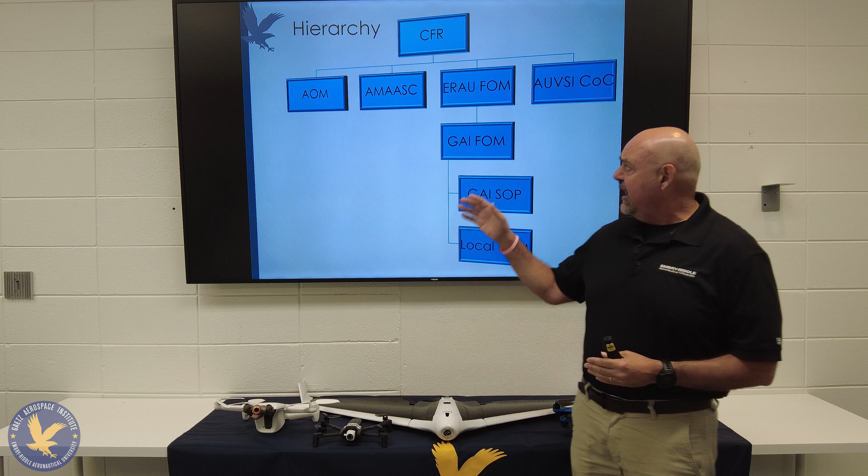Beyond that, we go down through the ERAU Flight Operations Manual, and then down to the Gaetz Aerospace Institute Flight Operations Manual. Every year we do a Stan Board to make sure everything we're doing is in accordance with the latest CFRs and with the Embry-Riddle FOM, to make sure we're within those guidelines. We promulgate that out to the schools so everybody understands how it's done. That's what this is about.

We're going to have you do this brief before you guys start flying, and before you start flying you're also going to be doing the TRUST certificate. The TRUST certificate allows you to do hobbyist flying, but also allows us to fly the drones in the classroom setting, okay?

Your SOP, our SOP, is for you to use as well. The SOP is a little bit more restrictive, and your further restrictions can be in your local FOM. So that's the hierarchy: the FOM, the SOP, and then your local FOM. Your local FOM cannot be any looser than what we do as guidelines in our FOM. You can be more restrictive, and that's the purpose of that, to keep you safe, because there may be things in your school that you have to be aware of that don't allow you to do the things we have at other schools.

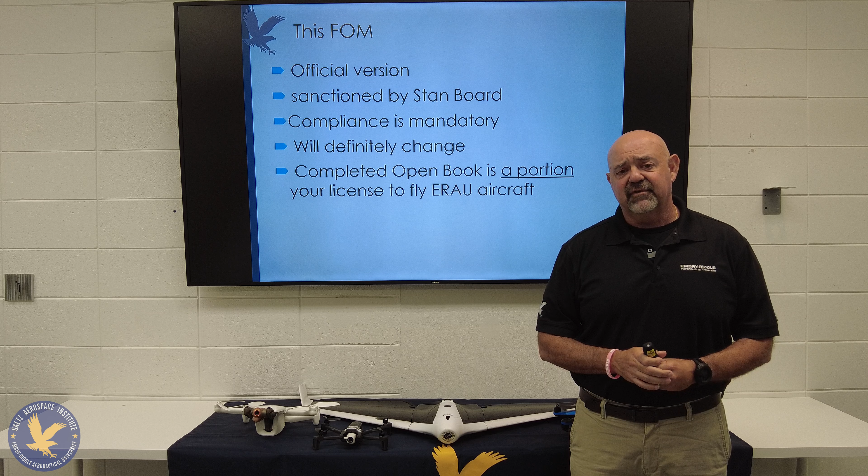Completed open book test is a portion of your license to fly ERAU aircraft. You have to get that open book test completed. As a student, you get a 95. For instructors, it has to be 100%. Open book corrected to 100%. Not a big lift, but we want to make sure everybody understands the material, because that's important for us to make sure you guys are flying properly.

Before we go any further, I'm going to brief you quick. You guys see the drones up here. We've got the Anafi AI, we've got our Anafis, we've got the Disco, and then we've got the Skydio.

So these are the drones that we are going to be using. There's a bit of a change. Everybody knows the DJI has been an issue with other schools. So now what we're doing is we're trying to use the Skydio and the Anafis and the Anafi AI to complement what we're doing. The fleet's going to change over. It's going to be a long changeover process because the cost of these is much higher than the DJI products. But I want you all to understand that these will be the fleet going forward, so we'll get very comfortable flying these, and we want to make sure you guys are flying them properly.

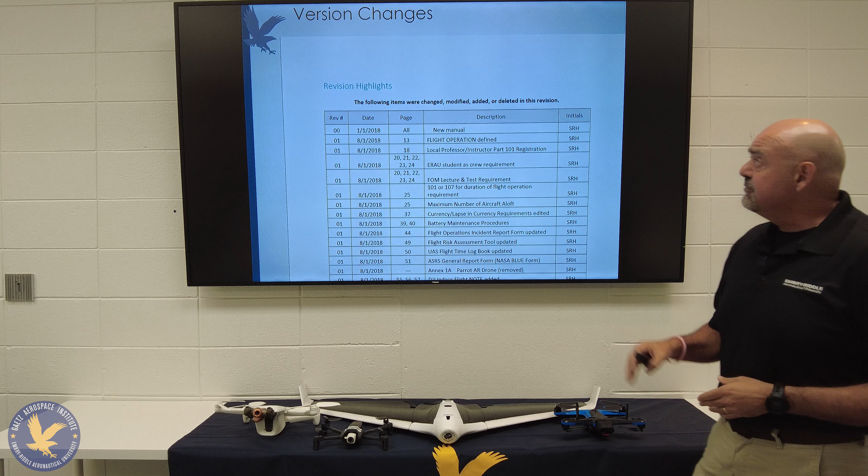Okay, going back to the FOM brief, revision and highlights. This is how we do our changes. So when we brief this, if there's any changes that come out from the Stan Board, this is where you'll find all the changes.

Policy: teachers and instructors are responsible to ensure each student is thoroughly familiar with local FOMs, locally created FOMs, not to supersede the requirements of the GAI FOM. So again, your local FOM could be more restrictive, but it cannot be any looser than what we do here at Embry-Riddle, okay? And that's why those local FOMs are there.

Okay, keywords: will and shall. Those denote mandatory, okay? If something in that FOM says will or shall, that is a mandatory thing you must comply with. Should: preferred but not mandatory. If something in there says should, that means it's not mandatory, but it's highly recommended. May suggests something suggested, so if we say something along the lines of may cause injury or may allow you to do something, that is something that's suggested, so pay heed to that, okay?

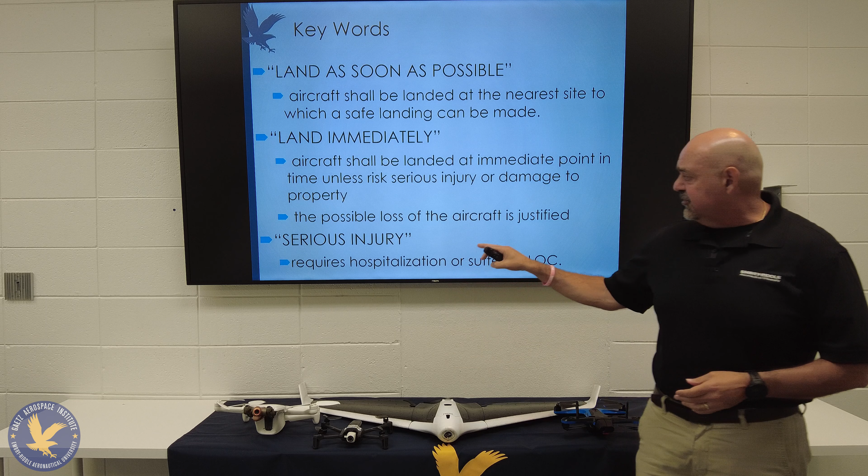Possible loss of the aircraft is justified when serious injury requiring hospitalization or loss of consciousness is at stake. We don't want anybody to get hurt.

So when we're flying these drones, please, please, please be very careful. They look small, but if this thing's coming at you at about 30, 40 miles an hour, it's going to hurt. It could actually cut you and possibly kill you.

Flight crew member or flight personnel: any person, teacher, student, or other who is associated with given flight operations. You're part of that flight crew, and everybody in that flight crew is responsible for safety.

If you see something, say something. If somebody's walking into the path while you're doing flight operations, you need to halt those operations and make sure everybody's safe. Everybody out there has a portion of responsibility for safety.

Deviations are authorized in the interest of safety. So if something happens and you have to deviate outside the acceptable lines, for example, if an aircraft or something comes into your flight path and you have to go above your restricted altitude momentarily to bring that aircraft back down, that's okay. You're allowed to deviate, but you need to get that aircraft back down as soon as possible, because you're doing that in the interest of safety.

If that does happen, though, you need to let us know as soon as possible. If any of these things happen, let myself, Charles, or Blake know right away, so we can make sure there are no repercussions to you or the school.

Local permit deviations and waivers are possible, but must be approved by the GAI Executive Director. If you have some sort of deviation or waiver you're trying to get, we need to know about it. We'll look at it, evaluate it, and see if that's something we can push forward.

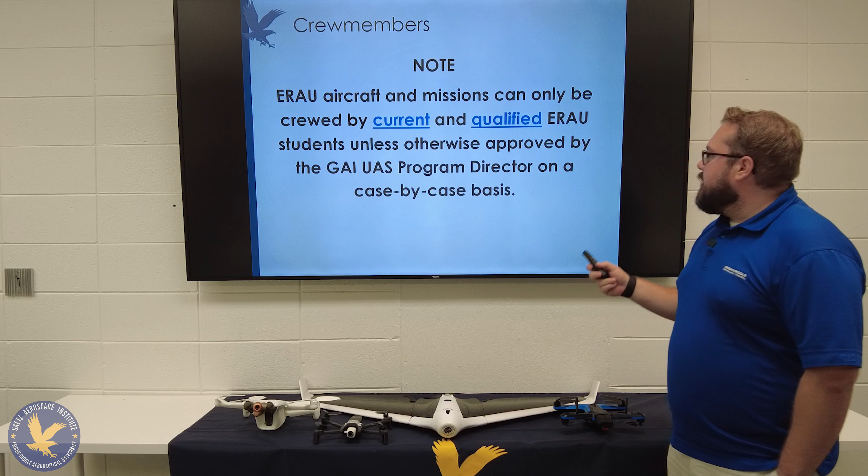Note: ERAU aircraft and missions can only be crewed by current and qualified ERAU students, unless otherwise approved by the GAI UAS program director on a case-by-case basis.

So what does it mean to be current and qualified? First step is FOM, having the test done, and secondly, having the TRUST. The ERAU instructor has different qualifications they have to uphold as well: one is the FOM open book test, the same as the students, and secondly, they're going to have their remote pilot in command certificate through the FAA, along with their TRUST as well.

Note, in place of the rule set formerly referred to in this FOM as Part 101, the reader may see the phrase 'the exception.' This maintains continuity with the exception for limited recreational operations of unmanned aircraft. To add a bit more confusion, we used to talk about Part 101 hobbyists, then the FAA started calling them the exception, and now the exception has turned into the recreational pilot. So if you hear any of those three terms, we're talking about flying for fun, without a commercial purpose. And if you hear about the exception or recreation, this is where TRUST falls into the realm of things.

Here at Riddle, we are all flying under the educational realm. We're flying under Part 101, the hobbyist, the exception. We have that mindset. But we hold our teachers to a higher standard of having that Part 107, that RPIC certificate, because we want to build rigor.

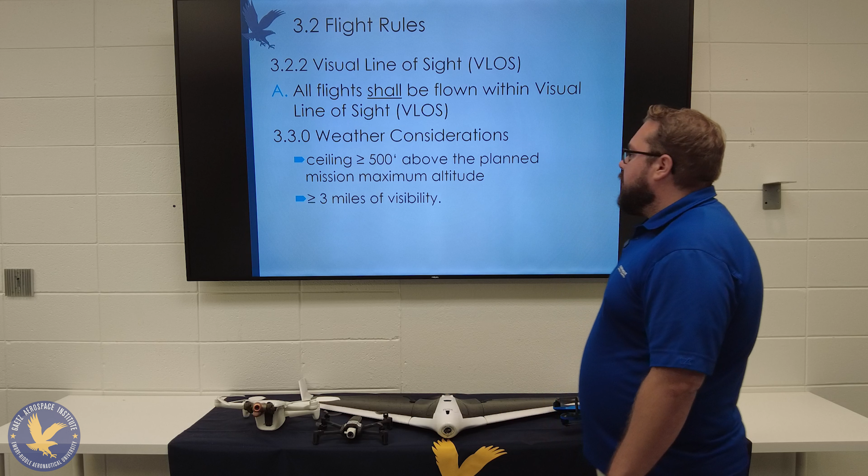Weather considerations: ceilings greater than or equal to 500 feet above the planned mission maximum altitude, and visibility needs to be greater than or equal to 3 miles, and that goes right back to the actual FAA weather limitations. Outdoor flight operations shall not be conducted with audible thunder, visible rain, and winds.

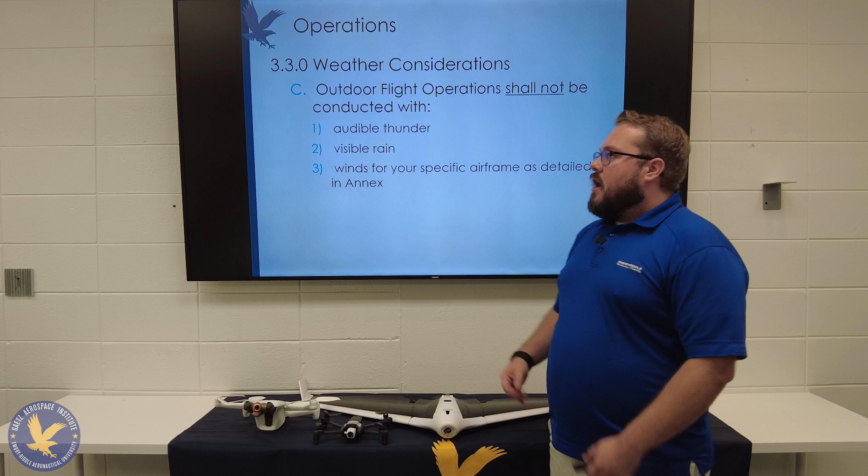You see your specific airframe is detailed in the annex. In the back of the FOM, we have an annex where we talk about each of the aircraft and what winds they can sustain.

What wind limitations the manufacturer has set and what we've put on there. So audible thunder and visible rain, moisture is not a friend for electronics. Thunder, we don't want to get electrocuted, we're not trying to get struck down. So in any of those situations, outdoor flight shall not be conducted.

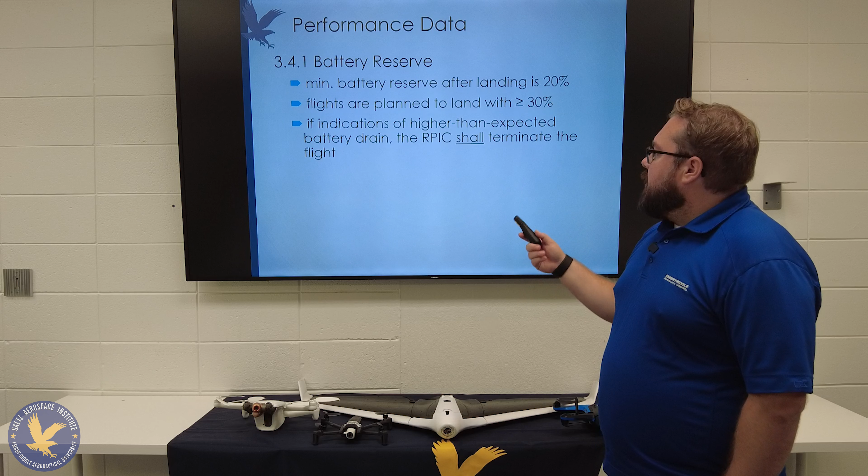Performance data, battery reserves. Minimum battery reserves after landing is 20%. Flights are planned to land with greater than 30%. If indications of higher than expected battery drain, then you shall terminate the flight.

Always keep an eye, even as the RPIC, on your battery. Yes, you're watching the aircraft, you're doing visual line of sight, but you're allowed to look down every now and again and check your battery. If not, the team lead should ask every now and again, what's your battery level?

Where are we at? At 30%, you should start considering returning to home and getting closer to the landing and takeoff position. If you're around a little above 30, start heading back. If you're at 30, you're definitely heading back home, stop what you're doing. If you get below that and you missed it, definitely start bringing it back.

At 20%, you should be on the ground. Don't let it drop below 20. It's the nature of these lithium polymer batteries - the cool thing is they have a constant voltage and amperage, which is great, but they don't slowly die, they knee off really, really hard. That means you can go from 100% full functioning battery to absolute zero like that.

And if the drone's at 200 feet, then it falls, and now we have a broken aircraft. So we want to keep you flying and keep us from working on aircraft. So at 20%, it should be on the ground.

Now let's say you're not at the takeoff landing location at 20%. If you're in a suitable area where you can land it in the grass, it's just further away, then land it, land it as soon as possible. It goes back to the definitions in the beginning of the PowerPoint - land as soon as possible, land as practical, so that you don't damage the drone.

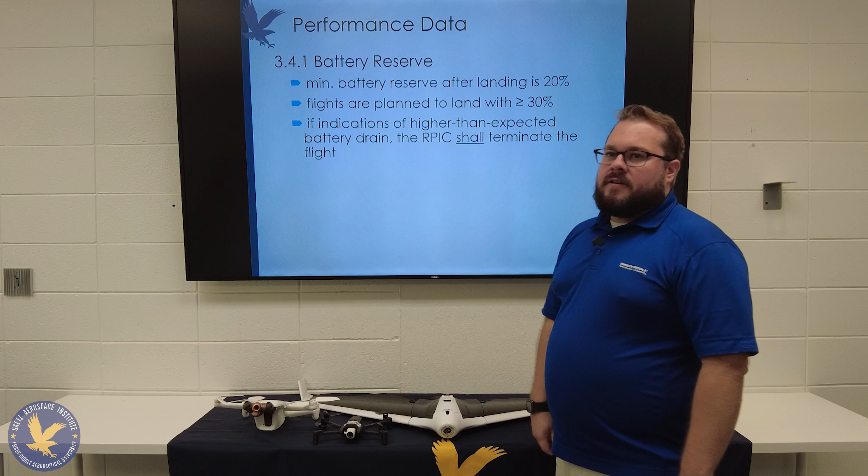If indications are you see battery drain happening a lot quicker than normal - if you're usually getting 30-minute flight time out of a battery, 25 minutes, 20 minutes - and next thing you know it's like, oh, we've only been flying this thing for like 5-10 minutes and we're already at like 30% or 40%. That's not right.

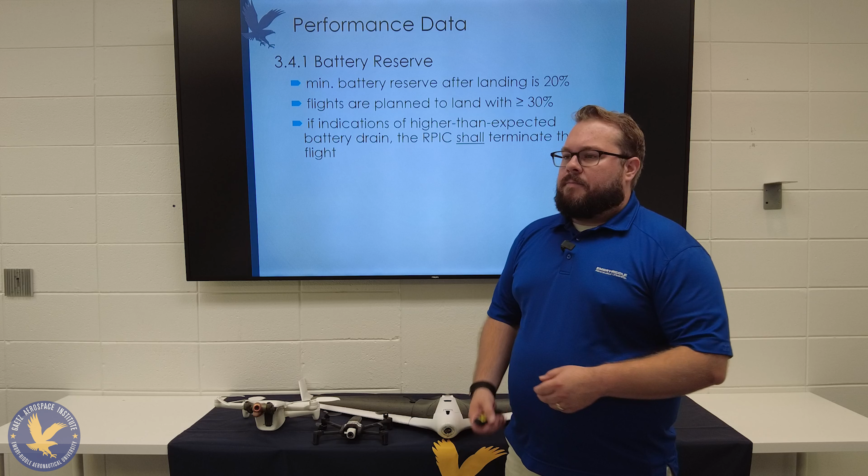That's where you need to land as soon as possible. You got to terminate that flight because that could lead to the aircraft falling out of the sky.

Landing requirements: if for any reason the GUI shows 20, land as soon as possible, just cover that. For any reason the GUI shows 10, land immediately, but do not sacrifice the aircraft. Do not do that. We're not losing aircraft today.

3.5, site requirements. Small unmanned aircraft system flights should, to the greatest extent possible, be conducted over sites that are unpopulated, uninhabited. VTOL aircraft, non-essential persons not within 10 feet of the aircraft, should not be flown over 250 feet above ground level unless required by curriculum goals and mission requirements, and shall not exceed 400.

So let's cover all that. Flights should be, to the greatest extent possible, over unpopulated, uninhabited areas. Well, we're at a school - obviously it's populated, and obviously there's people below us.

What does this mean? It means if we're flying on the football field or over the practice field, and let's say we're flying over the football field with a track around it, all of a sudden here comes the gym class and they're running around on the track. You shouldn't be flying over top of the people at all. That's a big rule breaker.

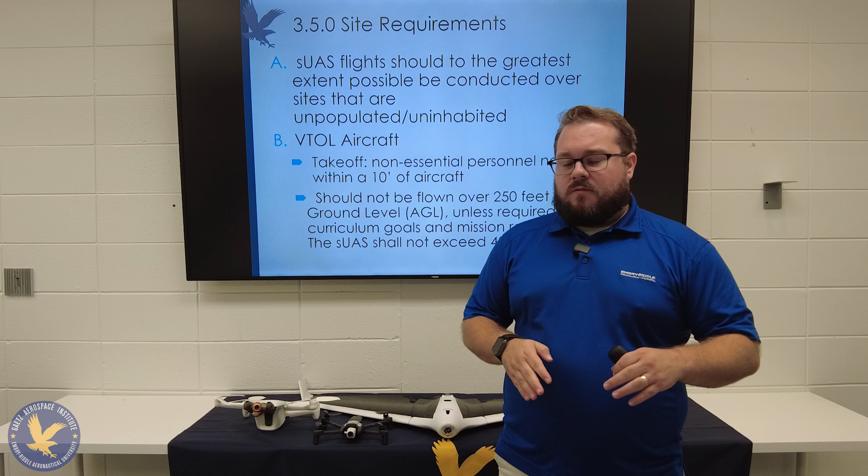If you are asked to do some other events where you are flying around people, you don't want to fly over the general public. There are certain rules that you can do this under Part 107, but under our FOM we do not fly over them unless absolutely necessary - meaning there's an emergency situation or some reason to get the aircraft back and you have to transition over people, then do so.

VTOL aircraft, that's vertical takeoff and land, such as all of these except the Disco here. Stand at least 10 feet from the aircraft before taking off.

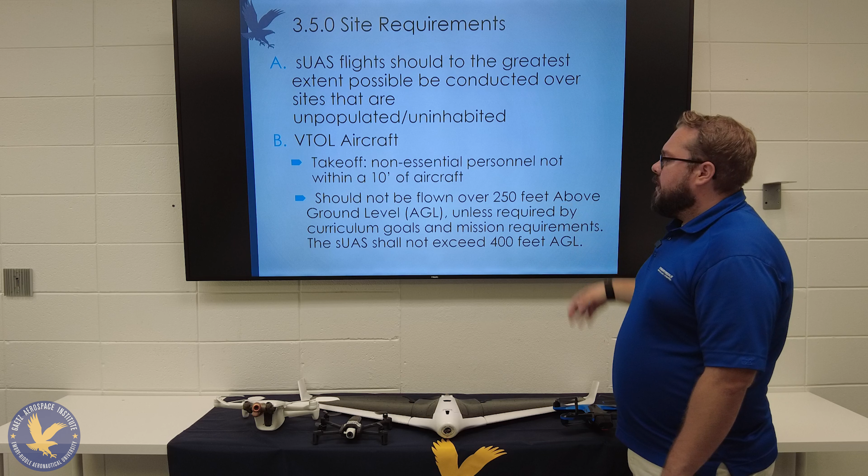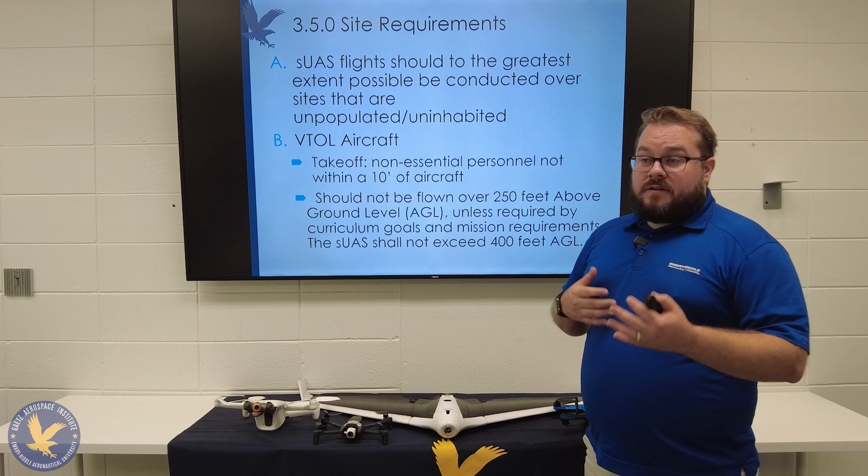We do not fly over 250 feet above the ground unless required by the goals or the missions. Typically, all of our flights will be done within 100 feet of the ground or even 50 feet. For the 235, I would see myself maybe getting in the 150 range. For the 237, we may need to go above this if I'm making a video of the campus and getting large wide-angle shots. But no matter what, we shall never exceed 400 feet. This has to be set forth and approved by the instructor beforehand.

Reference the FAA UAS facilities maps. If an aerodrome manager or a control tower exists, then LAANC approval is required. How do we get LAANC? What is LAANC? LAANC is the authorization when we're inside airspace that's not Class G or E. So we're talking B, C, D airspace. We need approval to fly within that airspace because that airspace goes to the ground, and if we're 1 foot off the ground, we're inside their airspace, we need permission to be there.

LAANC is an automated app-based notification system where I can put in my information, send it off, and get a text message back almost immediately saying I have approval, here's your number, and you're allowed to go fly for that period of time. The tower knows you're there, everything's copacetic.

If you are outside of the areas in the facilities maps where there is no bubble or height restrictions, then you don't need LAANC approval. You're in Class G airspace and you can fly just as a recreational flyer. You take off outside, no problem.

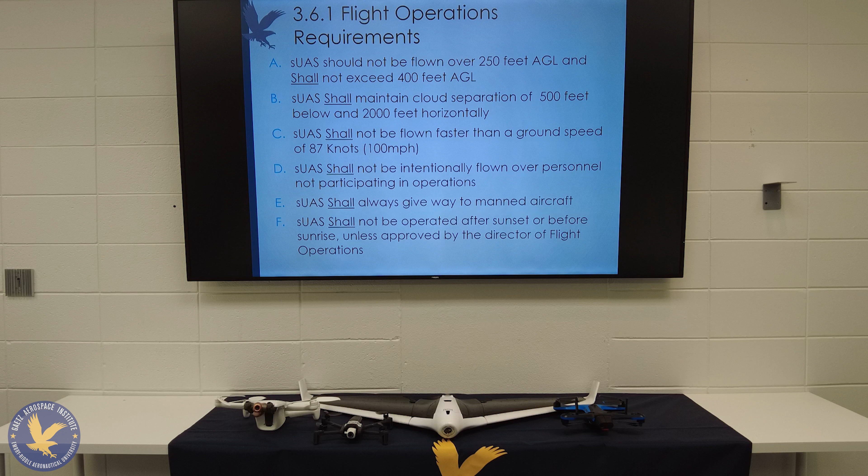sUAS shall not be flown over 250 feet AGL, above ground level, and shall not exceed 400 feet AGL. sUAS shall maintain cloud separation of 500 feet below and 2,000 feet horizontally from a cloud. sUAS shall not be flown faster than a ground speed of 87 knots or 100 miles per hour. sUAS shall not be intentionally flown over personnel not participating in operations. sUAS shall always give way to manned aircraft. And sUAS shall not be operated after sunset or before sunrise unless approved by the Director of Flight Operations, also known as Dave Moorfield.

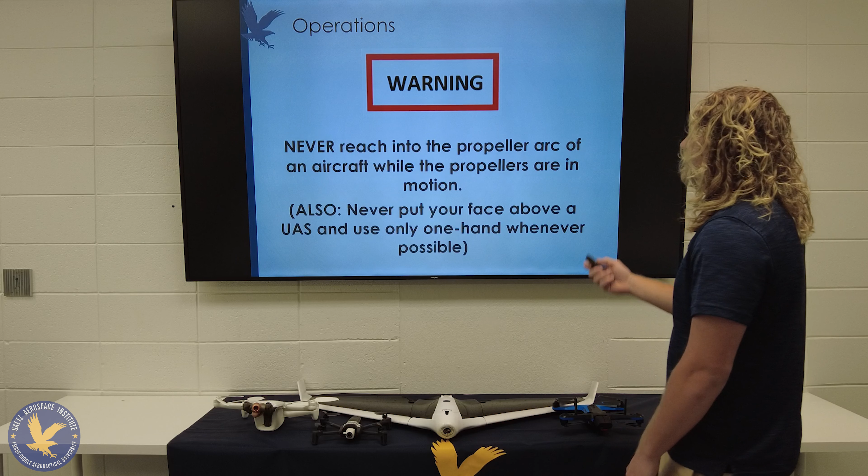Another warning: never reach into the propeller arc of an aircraft while the propellers are in motion. Pretty straightforward, but I've seen incidents where people get lacerations. These propellers will cut you. And of course, never put your face above a UAS, and only use one hand whenever possible. Again, we have a training video on this called Face Full of Drone. Never go like this over a drone, whether it's on or not. It's just good practice.

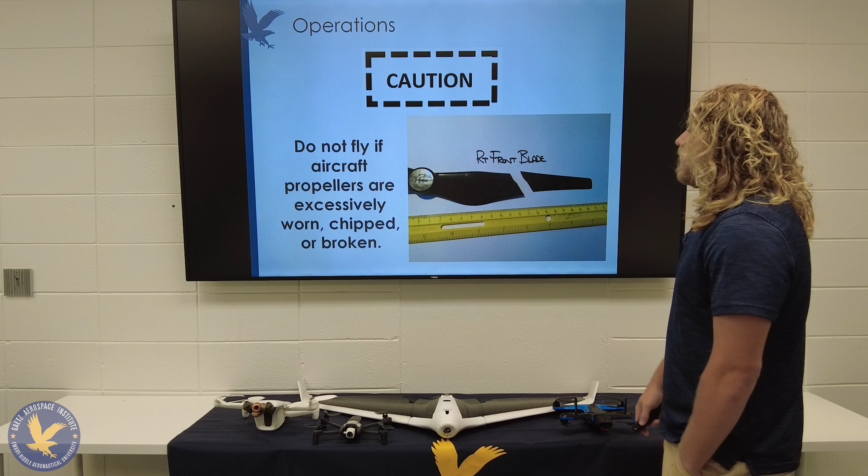All right, caution: do not fly our aircraft if the propellers are excessively worn, chipped, or broken. Now, obviously this is an extreme case, and that would probably cause the drone to not even take off in the first place, but it's good practice. This is in our checklist as well, to check the condition of the props before each sortie you take off, because most of the time props actually get damaged while they're on the ground. So it's good practice before you turn the drone on to verify the condition of the props and make sure they're connected to the drone securely.

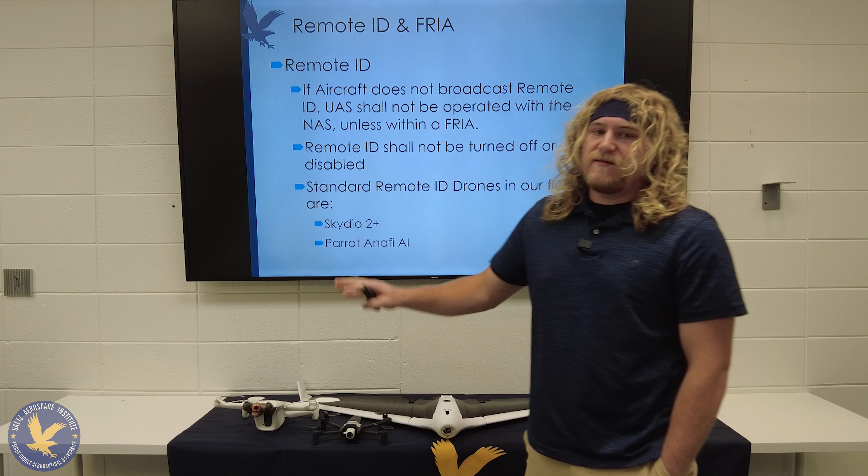All right, remote ID and FRIA. This is the biggest change going on right now in the UAS industry, and also in our FOM. Remote ID: these two aircraft right here broadcast standard remote ID. These two aircraft do not broadcast any remote ID. So we're just going to dive right in. If an aircraft does not broadcast remote ID, the UAS shall not be operated within the national airspace system unless it's within a FRIA. Remote ID cannot be turned off.

This is laid forth by the FAA, and we're extending that in our FOM. The standard remote ID drones in our fleet are the Skydio 2 Plus and the Parrot Anafi AI. Any custom-built drones at your school do not broadcast standard remote ID without a broadcast module.

So what is a FRIA? A FRIA is a FAA-recognized identification area, a defined geographic area where drones can be flown without remote ID equipment. Both the drone and the pilot must be located within the FRIA boundaries throughout the operation, and the pilot must be able to see the drone at all times through the duration of the flight. That's our VLOS operations rules.

For FRIA site applications, we're leaving this up to the instructor at the school. You are the responsible person for your school. We cannot apply for you, because it contains a lot of sensitive information, and you are the point of contact, so you need to put in your personal information and be responsible for this FRIA application. You can apply for a FRIA in the FAA Drone Zone. Just Google FAA Drone Zone, get yourself an account, sign up, and it's pretty simple. There's a big button that says FRIA application. You go in there and start applying for it over your school.

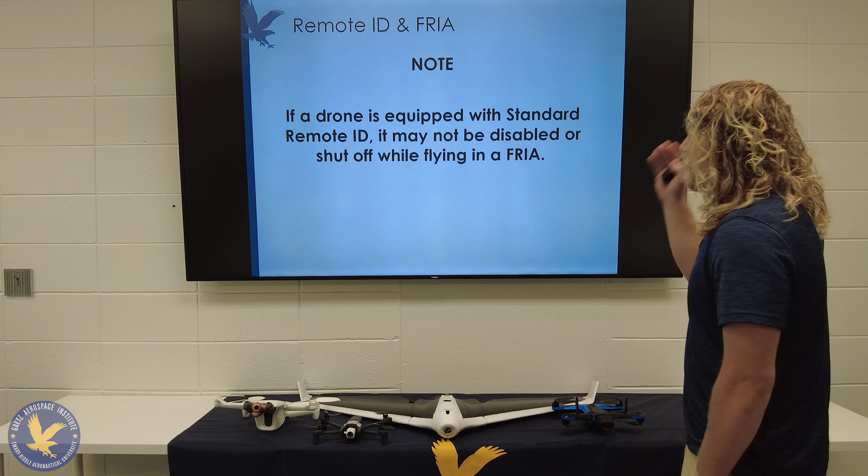Another note: if the drone is equipped with standard remote ID, it may not be disabled or shut off while flying in a FRIA site. So if you happen to be flying an Anafi AI at your school and you have a FRIA at your school as well, the FRIA does not replace the need for remote ID. The FAA and us are saying you still need to have remote ID broadcasting on your drone, even if you're operating at the FRIA site. The FRIA just allows you to fly without standard remote ID if you do not have a drone that broadcasts.

Last point on FRIA: if your school's fleet contains any aircraft other than the Skydio 2 Plus or the Anafi AI, then a FRIA shall be obtained for the area of operation at the school, and the UAS that do not broadcast shall not be flown until the FRIA application is approved. So if these two drones are the only ones you have in your fleet, you are good to go. They broadcast standard remote ID and do not need to be flown within a FRIA zone.

If you have a custom drone that does not broadcast standard remote ID and you do not have a remote ID broadcast module, then you must apply for a FRIA site, and you cannot fly those drones until that is approved. Otherwise, you are flat out breaking Part 89 remote ID requirements.